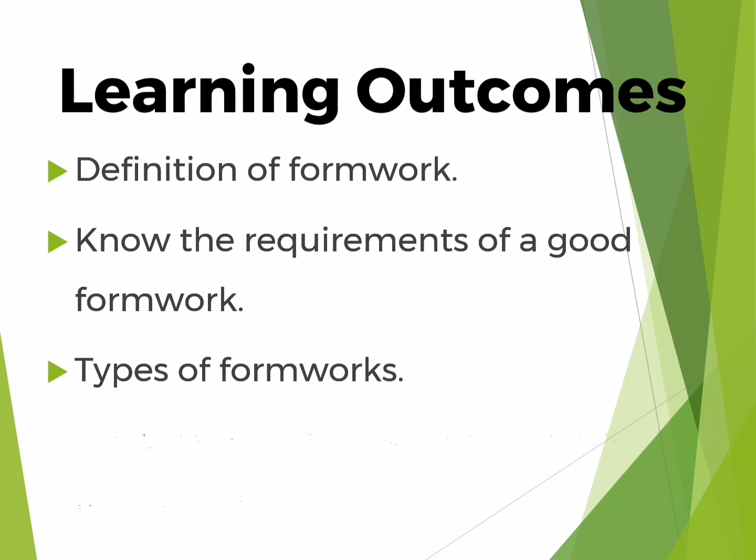Okay, so we'll start by learning what is form work today. What are the learning outcomes that we expect by the end of the lesson? You should be able to define form work, know the requirements of a good form work, know the types of form work, and also be able to identify materials that are used in making the form work.

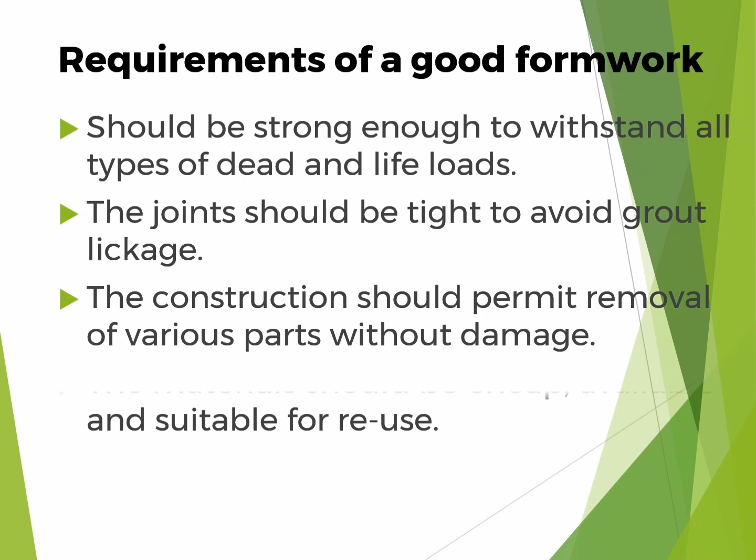Carrying us forward, let's look at definitions. What is form work? Form work is a term given to either permanent or temporary molds into which concrete or similar materials are to be poured.

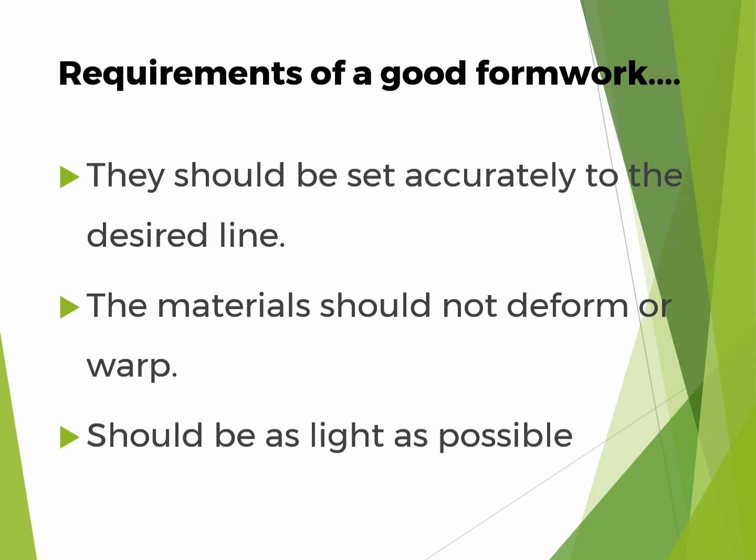What are the requirements of a good form work? It should be strong enough to withstand all types of dead and live loads. The joints should be tight to avoid grout leakage. The construction should permit removal of various parts without damage. The material should be cheap and available, so that you are able to afford it.

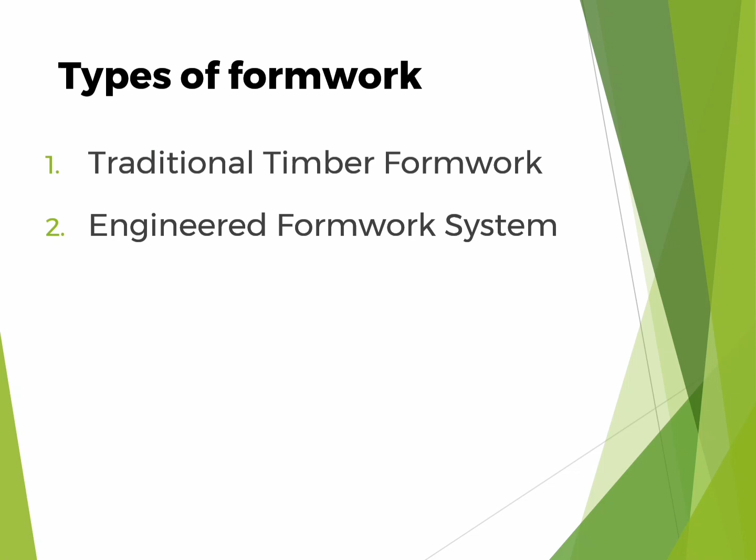What are the requirements of a good form work? They should be set accurately to the desired line. The material should not deform or warp. It should be as light as possible for easy work carrying.

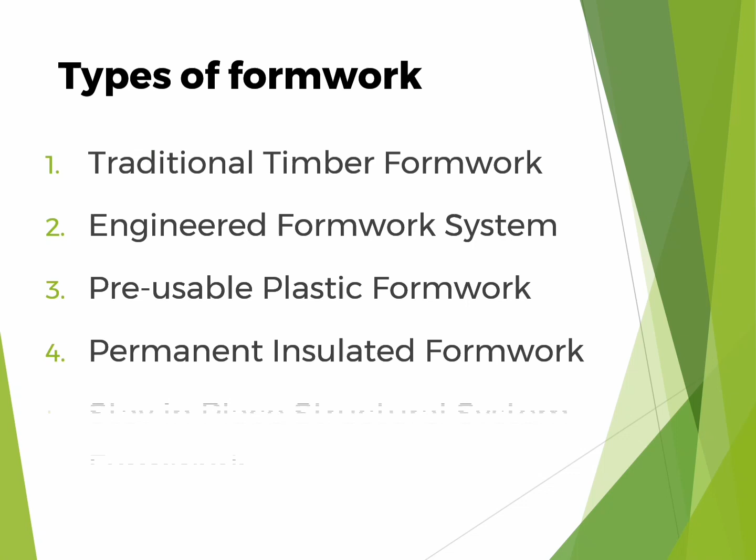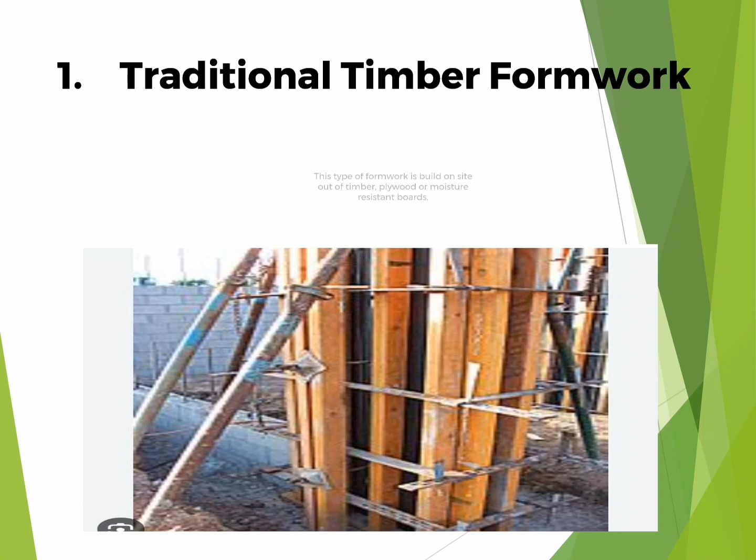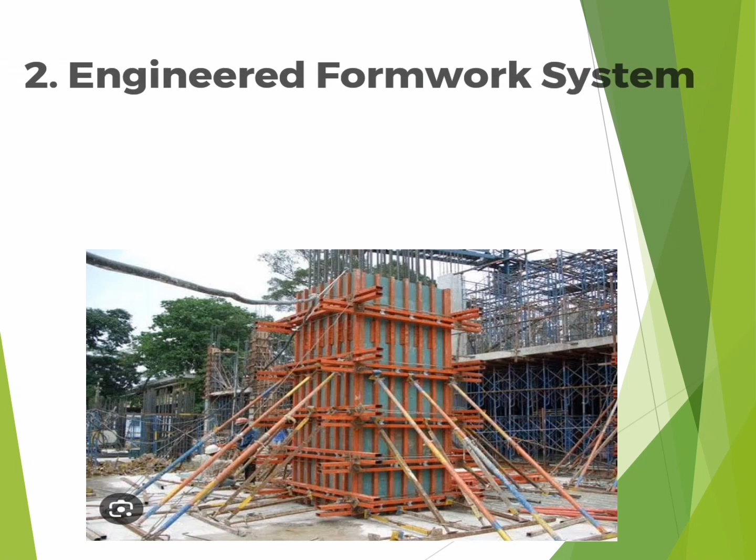What are the types of form work? We have traditional timber form work, engineered form work systems, reusable plastic form work, permanent insulated form work, and stay-in-place structural system form work.

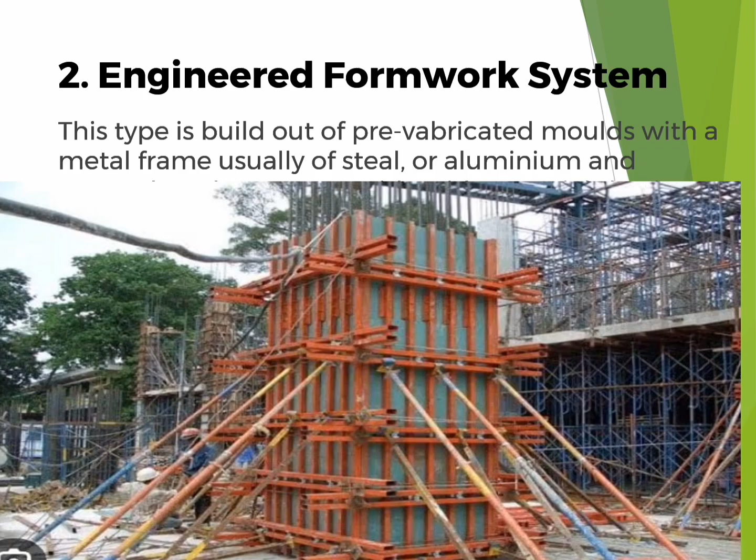Let's start by looking at the traditional timber form work. This type of form work is built on site out of timber, plywood, or moisture-resistant board. This one is very common on construction sites.

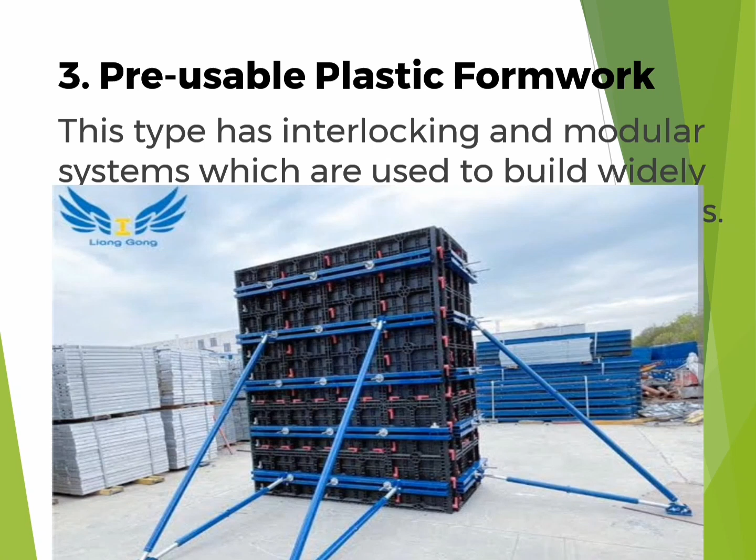Then we have engineered form work system. This type should be built out of prefabricated molds with a metal frame, usually of steel or aluminum.

Then we have reusable plastic form work. This type has an interlocking and modular system which is used to build the form work.